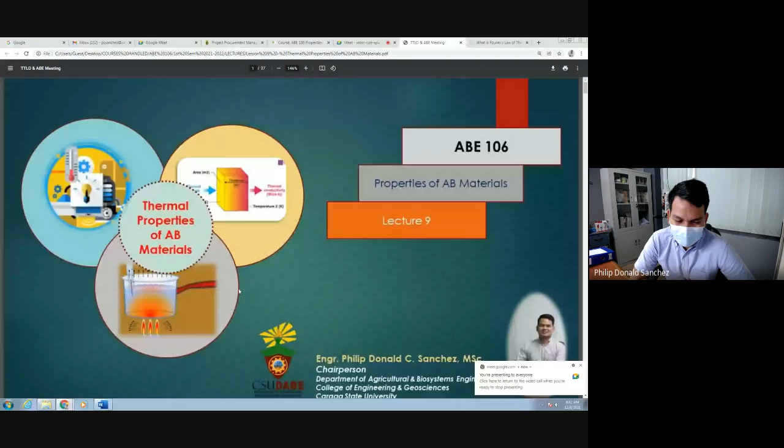Okay, Donald Tiamco, Donald, can you recall and share to us what is the nature of conductive heat transfer, or the mode of heat transfer which is through conduction?

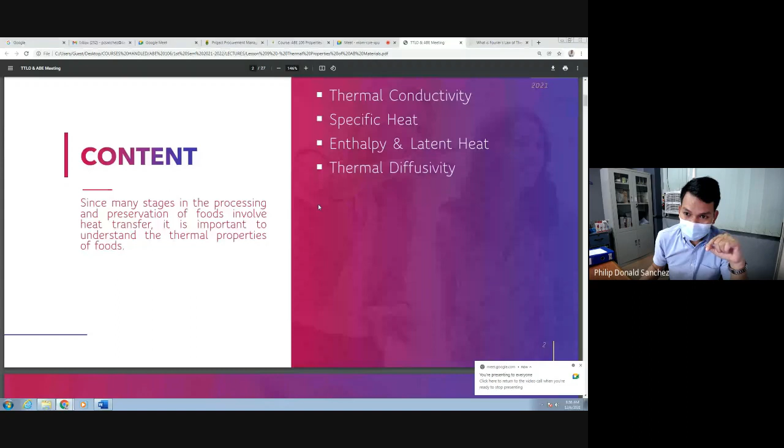Q, or the heat flux rate or the heat transfer rate, is equal to the negative rate of heat transfer by means of the material's conductivity, or the thermal conductivity of that particular material, times the thermal gradient, or the temperature gradient, which is T1 minus T2.

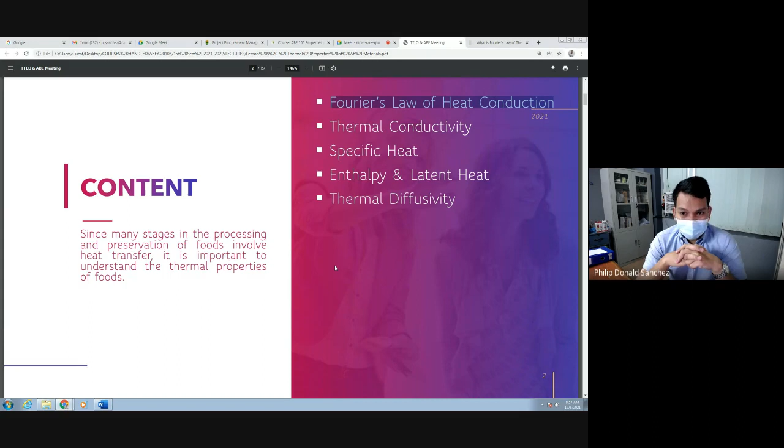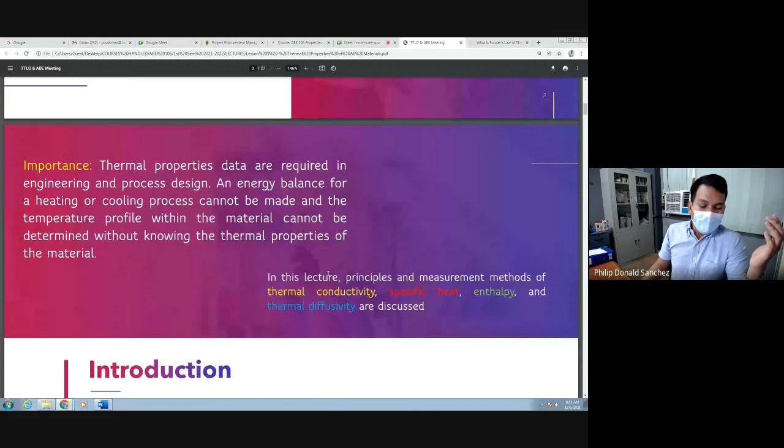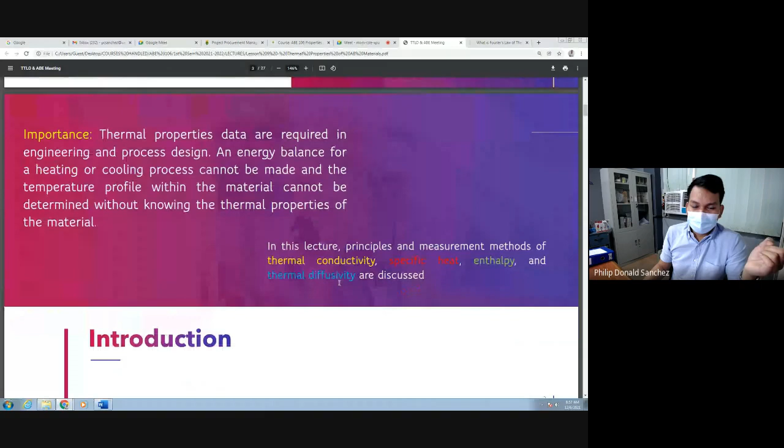Okay. It's very important, guys, that the thermal properties data are required in engineering. Kana pod, moingon na sila asa ang formula wa ni gibutang ni Sir Philip diri, no? So itanaw niyo sa Google na lang ang formula ni thermal property, ni thermal conduction, Fourier's law, and then try to understand again basig nakalimot na mo sa inyong heat transfer. So mag-agad na pud mo diri nga ako na pud nang spoon feed, no?

It's very important that the data are required in engineering and process design. Very important ang mga thermal data. An energy balance for a heating or cooling process cannot be made, and the temperature profile within the material cannot be determined without knowing the thermal properties of the material.

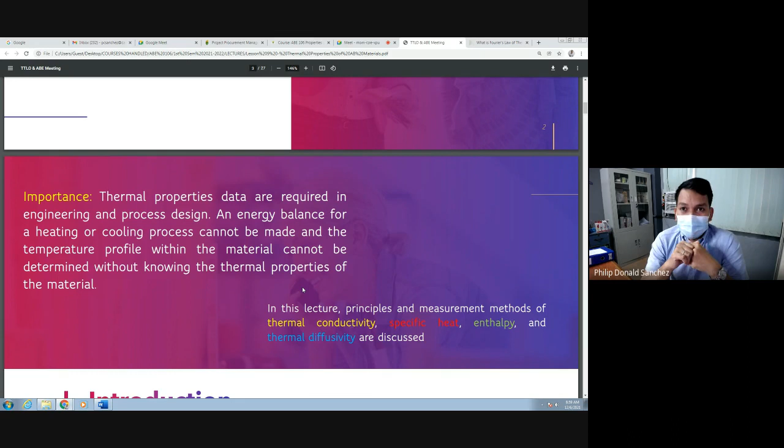preservation and processing. In this lecture, however, the principles and measurement methods of thermal conductivity, specific heat, enthalpy, and thermal diffusivity are taught, or discussed. Okay.

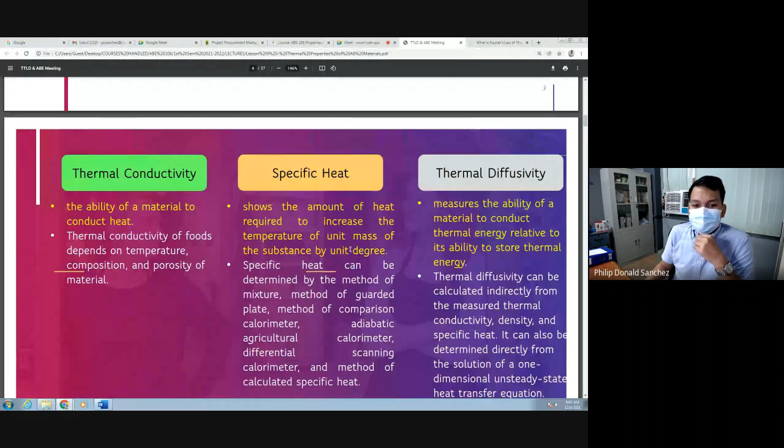So that's the difference between these 3 major thermal characteristics or thermal properties. Sabtan, pag-exam natin. Okay, just a review of Fourier's law. We need a driving force. According to Fourier's law, we need a driving force to overcome a resistance in order to transfer a property. What force ang iyang gipasabot ana? For any kind of molecular transport process like momentum, mass or heat, the general equation can be written as follows. The rate of heat transfer process is equal to the driving force over the resistance.

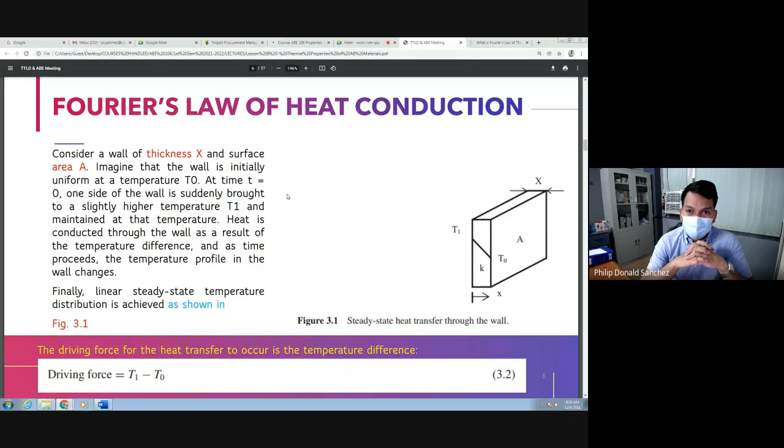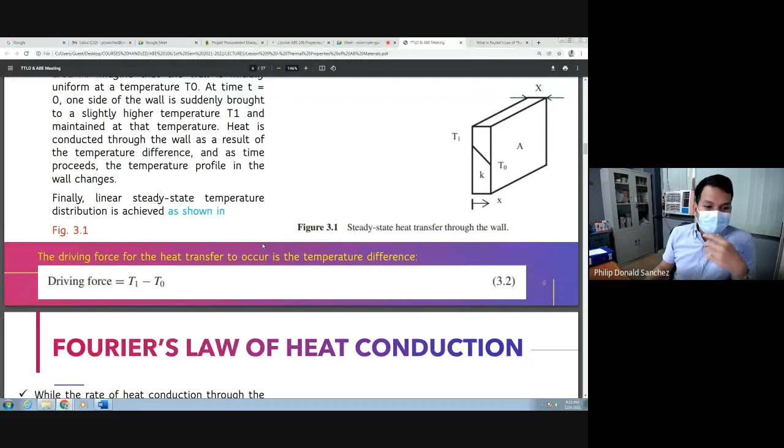The driving force for the heat transfer to occur is the temperature difference. Di ba? Temperature difference ang driving force niya. Why? Because wall side A and wall side B do not have the same temperature effect.

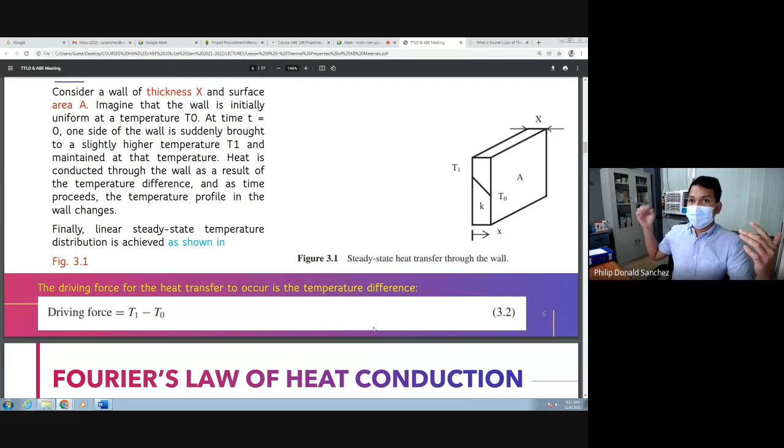Okay? So the driving force therein is the induction or conduction of heat by means of an air conditioner or by means of sunlight. So driving force, pasiglahi nga atong masabtan. While the rate of heat conduction through the wall is proportional to the heat transfer area, the thickness of the wall provides resistance to heat transfer.

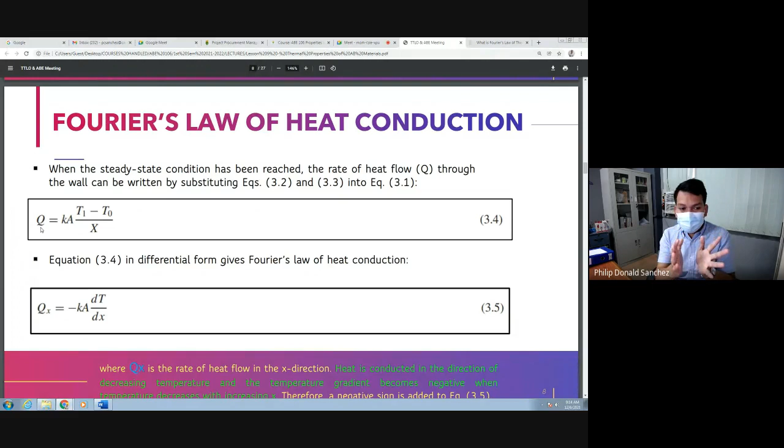You cannot find a material now without thickness. Even packaging material that's extremely thin, like biofilm, you still need to determine its thickness. That's why area is now involved, or thickness. Meaning, the thermal conductivity of the material times its area times the change in temperature is how you get the heat flux or heat transfer.

With the presence of the value x or thickness, if the temperature changes and the area changes, it will differ, and then the equation also differs as a differential equation: negative K times dT over dx.

Don't assume that if you use a wall, and you attach some material to it, but the wall you use is concrete, while another wall is also concrete but with an admixture like asphalt added, don't assume they have the same effect. Because they do not share the same material or composition, even if they have the same thickness, size, or area. Different composition means different temperature effect, and different material also varies.

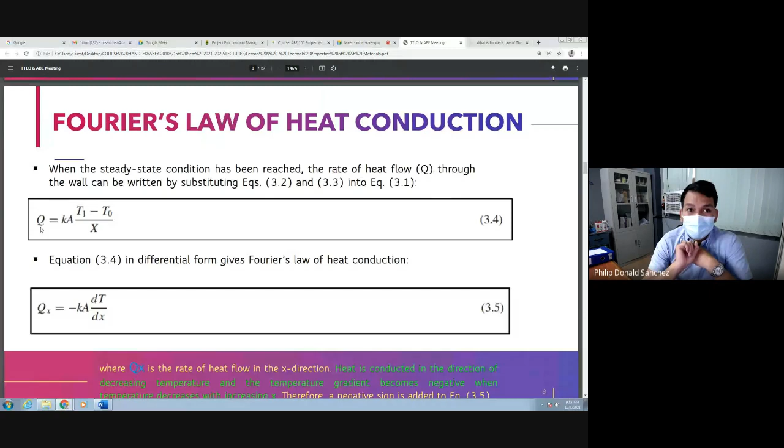Take note, heat flux is equal to heat flow, but it's different from heat transfer, because heat transfer is the rate of heat transfer. If you say heat flux, it's just the flux or the flow, meaning with the presence of heat or change in temperature and the thermal conductivity, that's the flux or flow. If you say rate, it's with the addition of area or thickness.

That resistance from the thickness aspect gets included there. That's why if you ask what is the local heat flux or internal heat flux, the unit for that is watt per meter square.

But if you say heat transfer rate, heat flow rate, or heat conduction rate, it's multiplied by the area correspondingly, to get the heat transfer rate. If it's just flux, it's just the flux on that particular area, or its presence of heat flux or heat flow.

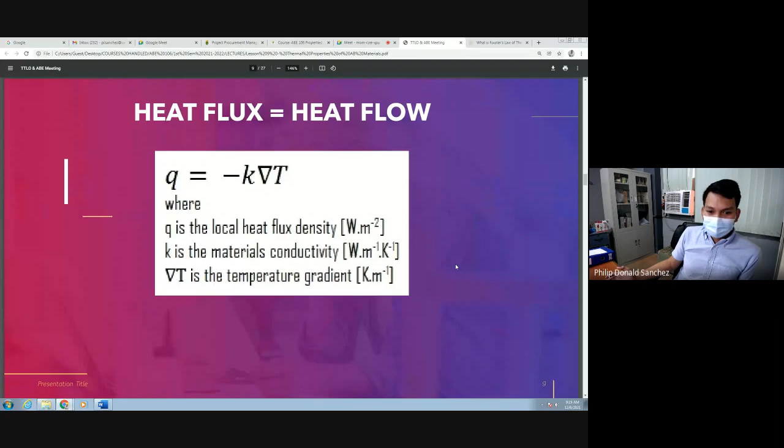Alright, so that's the reason now. If they ask that in the board exam, Bala can answer that.

Sample problem from Sir Philip, let's transfer to that. A major source of heat loss from a house is through the windows. Calculate the rate of heat flux through a glass window 1.5 meter by 1 meter in area and 3 mm thick, if the temperatures at the inner and outer surfaces are 14 degrees and 13 degrees centigrade respectively. Calculate the heat flux through this window. Assume that the thermal conductivity of common glass is K equals 0.96 watt per meter Kelvin.

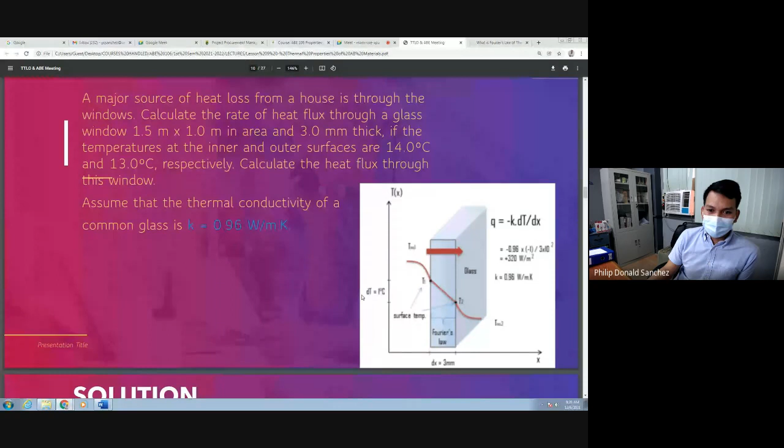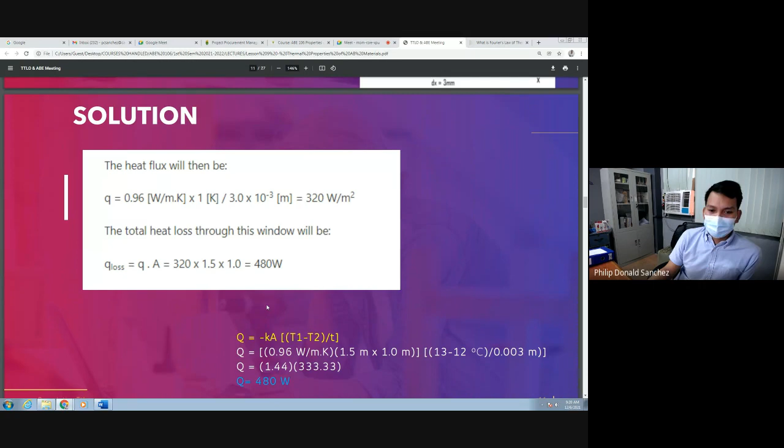So the area is 1.5 by 1 meter, or 1.5 square meters, but the thickness is 3 mm. You just convert it to meters, the 3 mm thickness. Then using the formula, negative K, A, delta T over T, or the thickness X, where X denotes that thickness, you can now get the Q loss equal to 480 watts. Just try to solve it there. That's the formula, there's no reason you can't solve it. And then you're done with that. Okay, so that's just the basic.

But the essence here is I want you to understand its effect later on regarding crops or ABE materials. Okay, basically the heat transfer you've already learned, what heat transfer really is. But the essence is on the crops or the storage. That's why I keep talking about refrigerators, freezers, chillers, whatever.

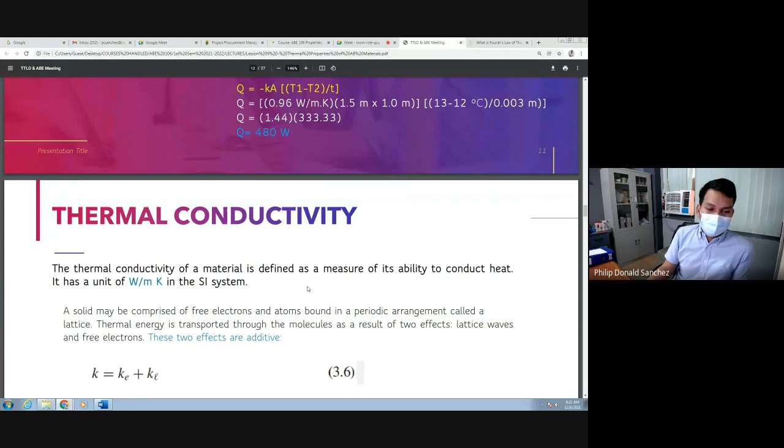Okay, the thermal conductivity of a material is defined as a measure of its ability to conduct heat. That's why I mentioned thermal conductivity, that's why its unit is watt per meter Kelvin. That's the ability of the material, that's why if you give it a temperature difference, from higher to lower temperature, how much ability this material has to resist or change accordingly to the difference in temperature with that particular thickness of the material or body. With that, you get its conductivity as a rate of watt per meter Kelvin.

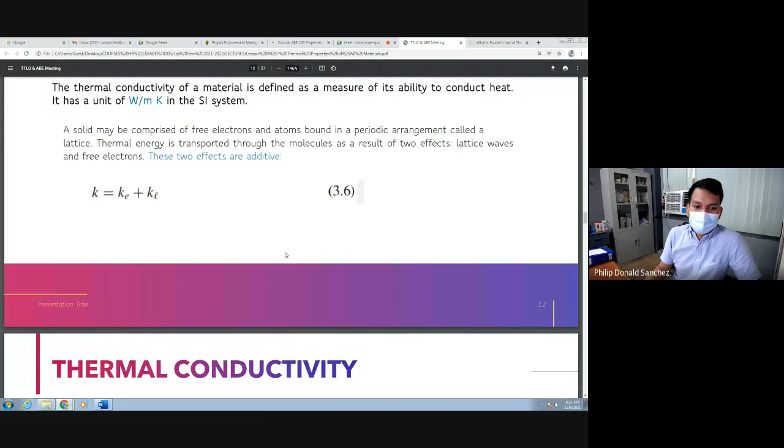Okay, so with that equation called additive, two effects additive, you just add effect 1 and effect 2, and then you have common effects in both materials. Okay, different materials have different thermal conductivity, as I've always mentioned.

What usually causes that to vary, guys? Of course, composition. But aside from composition, it's what we call vibrations or lattice vibrations. Like for example, steel material versus iron material have different thermal conductivity because the composition of iron and steel differs correspondingly, of course. But when we talk about vibrations or increase in effect, it differs because the vibrating effect given by steel or iron differs depending on the temperature you apply to them.

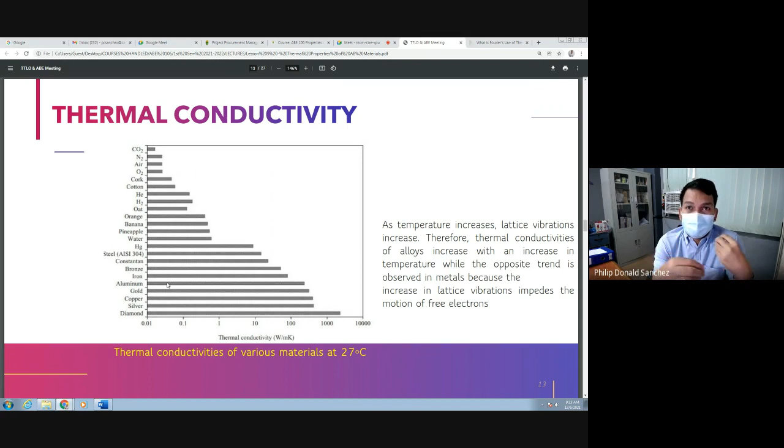All right, so thermal conductivity of ice is nearly 4 times greater than that of water. The thermal conductivity of ice is 2.24 watts per meter degree Kelvin, or degree Celsius, at 0 degrees Celsius, which is ice at freezing temperature. So at 0 degrees Celsius it's 2.24 watts per meter degree Celsius. Okay, this partly accounts for the difference in freezing and thawing rates of food materials.

During freezing, the outer layer is in the frozen state and the ice propagates toward the center, replacing non-flowing water by a better conductor. You've seen and tried frozen materials, right? For example, frozen meat. Okay, where does a frozen body start freezing? Outside or internal? External or internal? Outside, sir, external, outer layer. Why? Because it's the first to get affected, sir. Okay, what is it? You're in contact with the atmosphere.

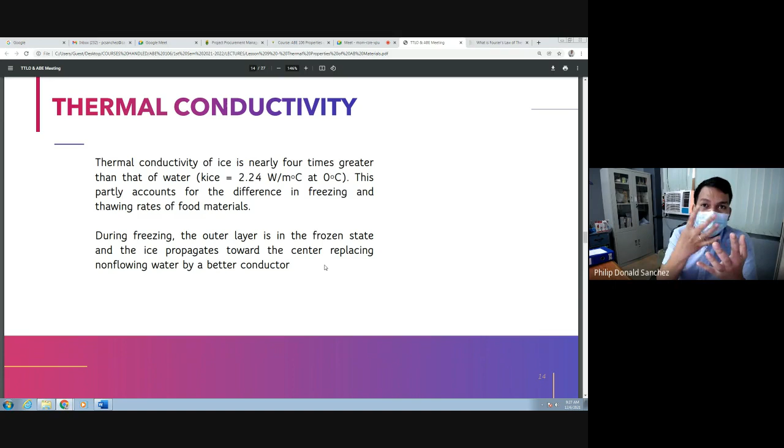Moisture, pero tungod freezing man god. Pero kung storage ra nga ref, wala na siya ingana nga effect. Moisture induction man god ang chilling. Pero kung freezing gani guys, mo-action siya gahi, mo-solid form siya, mo-action siya gawas ang internal niya. That's why pagawas ana mo, mo-form na dayon nga ma-ice na siya nga crystals. That's the reason behind. Pero kung i-ref ra nimo siya sa normal temperature lang niya nga 14 to 18 degrees, dili siya ingana, tungod kay dili man siya mo-solid form. Ang iyang mga kuan nga murag mo-evaporate pagawas, mo-form into crystals and then it will create mas ma-ice ang gawas kumpara sa ilalom.

And then pag slice nimo, gahi ang ilalom, di ba? Mas gahi ang ilalom pero mas frozen ang gawas. Pero mas gahi ang ilalom kay ni-gawas na ang iyang internal nga composition by means of moisture. Pero imo na siyang ihumol balik, mobalik na ang iyang tubig. Okay, so ingana siya ang reason.

Because you know, I learned this when we visited one of the freezing companies of durian. Ang reason ana ng i-frozen nila kay nagbisita mi sa una during my masters. Nagbisita mi sa durian nga i-package lang nila, i-packaging lang nila para ila lang i-baligya automatically sa market. Those durians nga gi-package nila, i-export pa nila dito sa China, i-export pa nila sa Australia and wherever they want to export, frozen.

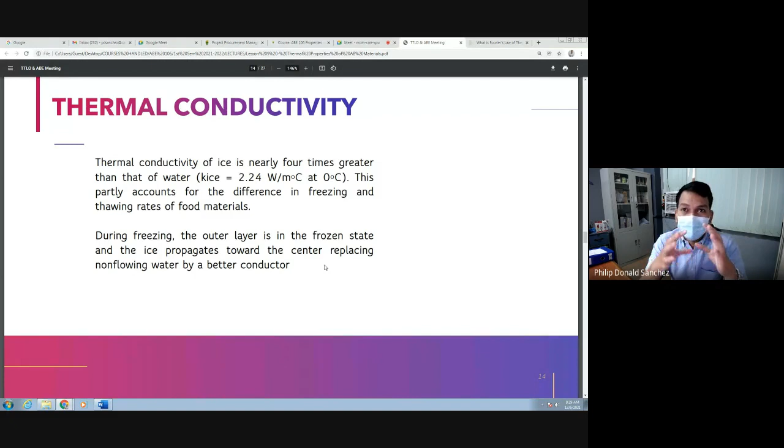Because when we freeze the material, wala siya corresponding effect as compared sa storage lang na normal nga ref. Pag defrost na nimo siya, compact ra, steady ra, maintain lang ang iyang composition. Pero una gid ang gawas nga mo-frozen because nagyapon na siya, nagtawag nato nga murag... I'm not sure if the correct term is evaporation gyud, pero ingana. Ma-defrost siya, retain ang iyang composition, na siya addition ng moisture, induction of moisture. But as to the flavor, as to the taste and the quality, the same. That's the essence of freezing.

Okay, so asa si thermal conductivity ni-sulod dito sa time, mga abilidad niya nga makaya niya. Kung di na kaya, then it's deteriorated na, baho na.

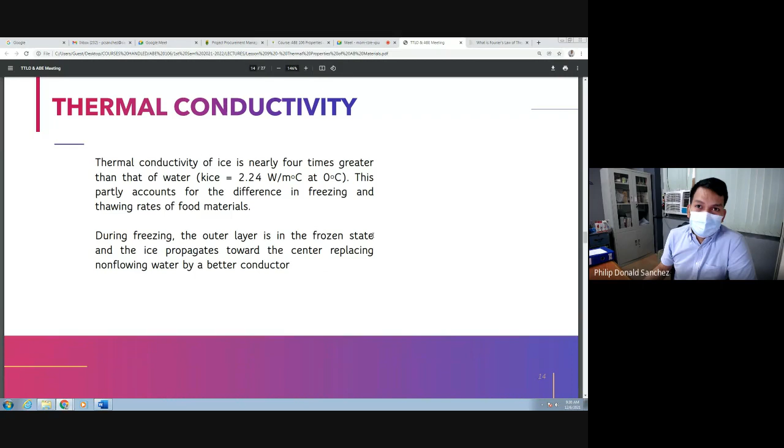That's why kanang mga exported nga materials, makabantay mo frozen gid na sila. Frozen. Uban, for example, kami, akong uncle, bisita mi sa Manila, i-frozen na ang mga crabs. Flight, pagkaugma isulod sa ice box ang frozen nga crabs, close tightly ang ice box. Pag abot dito sa Manila, bisan pag nag-flight ka or pila ka oras or nag-land trip ka, still the quality is okay. The only thing is na-siya moisture. But when you defrost, matanggal man ang moisture, but the quality is still retained. Okay, so that's the essence and significance of freezing.

Okay, measurement of thermal conductivity can be done by either steady state or transient state methods. In steady state methods, two sides of a flat object are maintained at constant but different temperatures, and the heat flux through the sample is measured. Steady state methods are longitudinal heat flow, radial heat flow, heat of vaporization, heat flux, and differential scanning calorimeter methods.

One side and the other side, wala kang ichange, and then nag-add ka or nag-maintain ka ng temperature on the different temperatures on the other side and the other side. But usually, these particular phenomena we can usually see this in kanang mga industries.

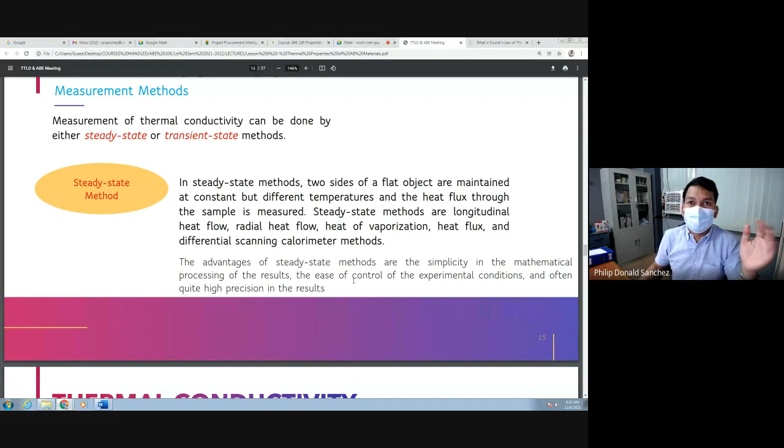No? But there's no need for us to memorize because the table, the internet or the books can give us what's the optimum range of storing that particular material. No? Pila ang iyang capacity. So, kung longitudinal state, so QL or the length of the material divided by the area times T1 minus T2 or the temperature gradient. Temperature gradient is another term for temperature difference. Pareho ra na siya. Gradients, no? The gap, no? Temperature gap, temperature gradient, temperature difference, no?

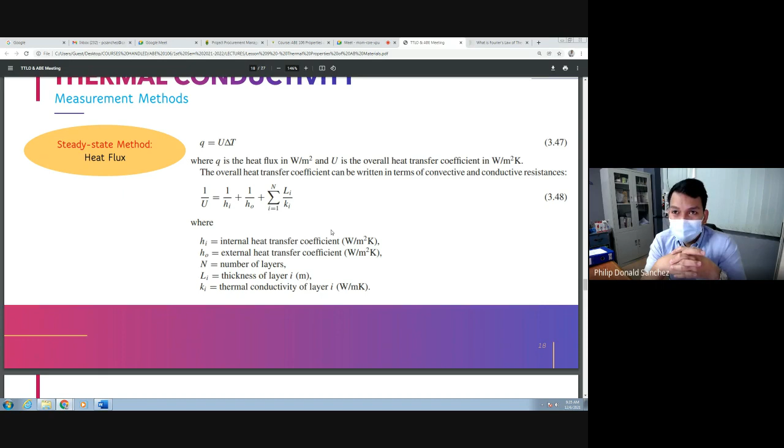So I hope that you're learning and you learn from the basics. A specific heat, no, sama sa akong gi-mention kanina, it's the amount of heat required to increase the temperature by unit mass, no.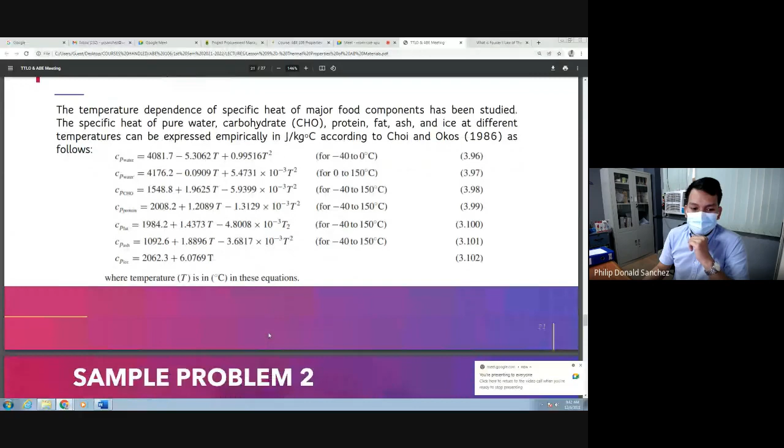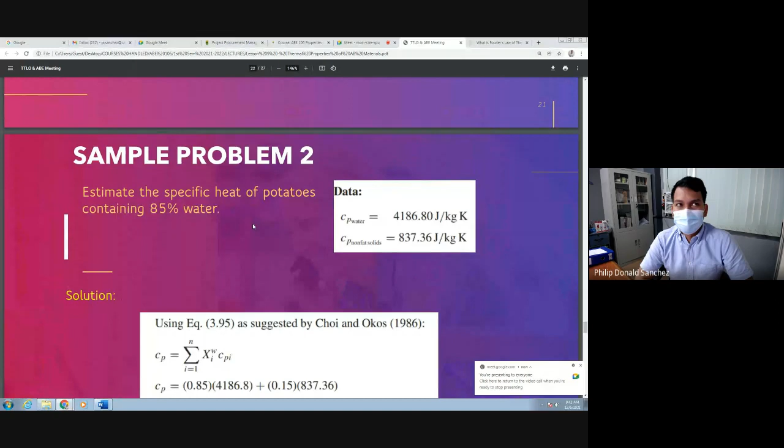Okay. For example, sample problem: estimate the specific heat of potatoes containing 85% water. No, ang patatas, 85 ang tubig daw ana sa sulod. Pila kang specific heat? The data shows that the constant specific heat of water is 4186.8 joules per kilogram Kelvin or 4.186 kilojoules per kilogram Kelvin. And then the specific heat constant for non-fat solids is 837.36 joules per kilogram Kelvin.

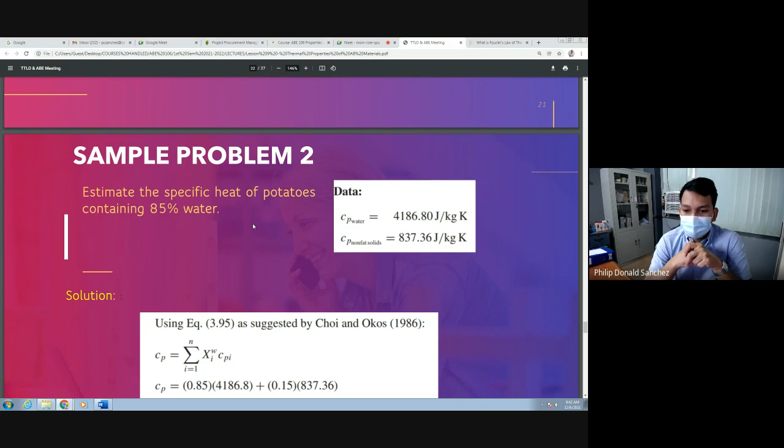Then, using the equation of Choi and Okos, you can now get the specific heat as the sum of 0.85, the water content, no? Then, multiply it by the value for water. Then, the remaining, out of 100%, which is 15%, would be the non-fat solids. Why? Because the composition of potatoes is just water and non-fat, or water and the carbs. The carbs represent the non-fat. So the starch of potatoes is 15% and the remaining is moisture or water.

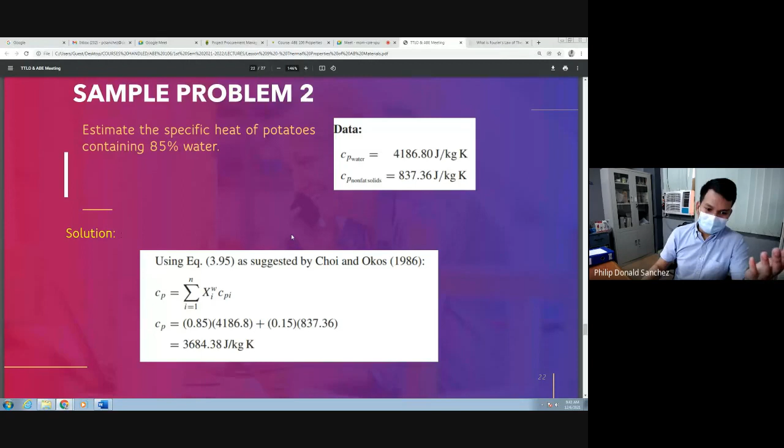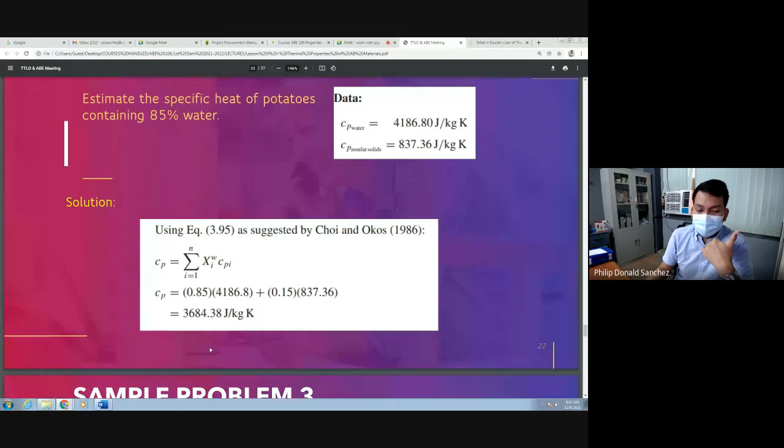Then, how to get it? Just a summation. Multiply the percentage of water times the specific heat value for water, and then plus the percentage of non-fat times the specific heat of that part. And then you can get the specific heat of potatoes as 3.684 kilojoules per kilogram Kelvin or 3684.38 joules per kilogram Kelvin. Basic. Dali ra.

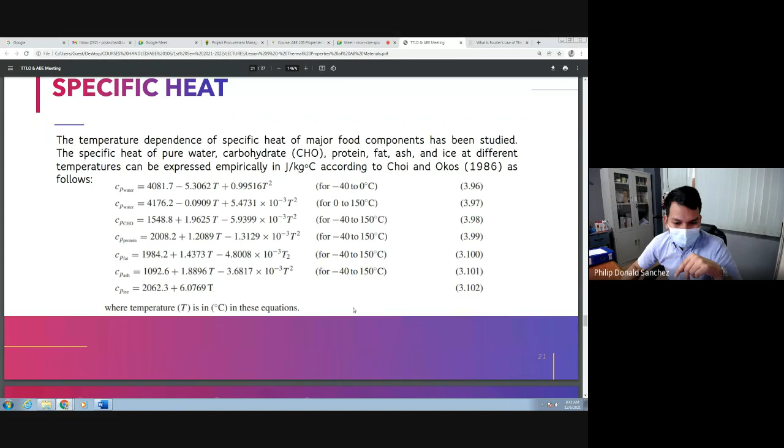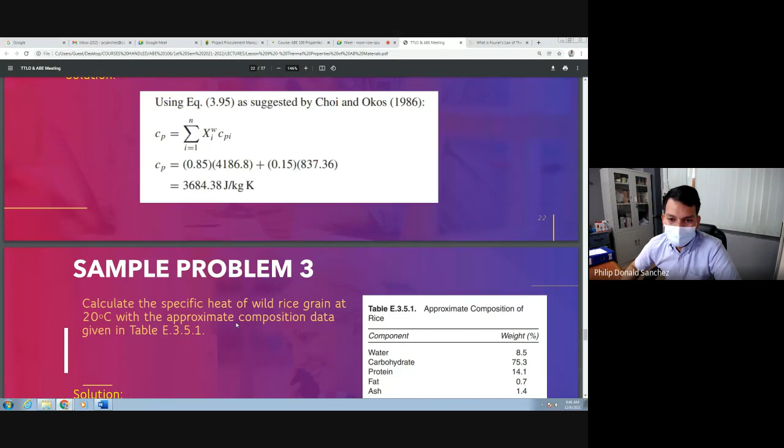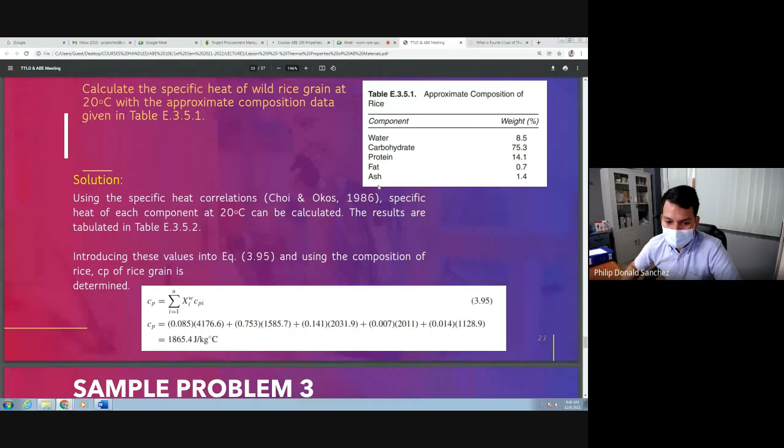The 8.5 becomes 0.085 times the specific heat of water, 4176, plus 0.753 for carbohydrates. What is the value of carbohydrates? The carbohydrates value is 1585.7, plus this weight times 2031.9, plus 0.007 for this one.

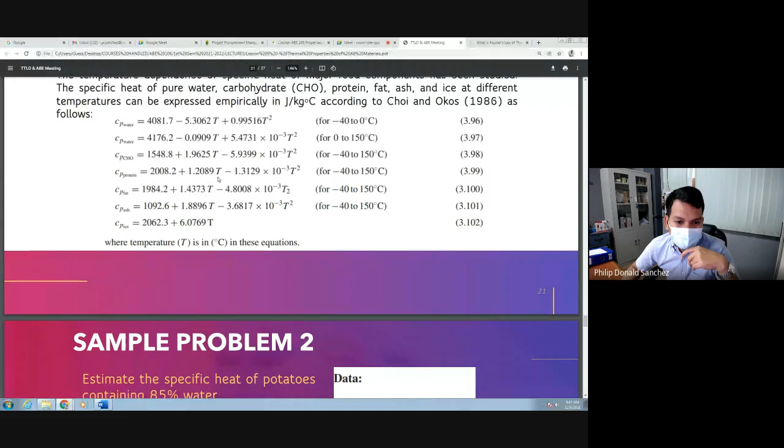So, if you input 20 into this: 4176.2 minus 0.0909 times 20 plus 5.4731 times 10 to the negative 3 times 20 squared, that is the value that comes out, 4176.6. For protein, if you input 20, the value for P also comes out. And then the CP of rice grain is equal to 1865.4 joules per kilogram degree Celsius. Then that's the specific heat.

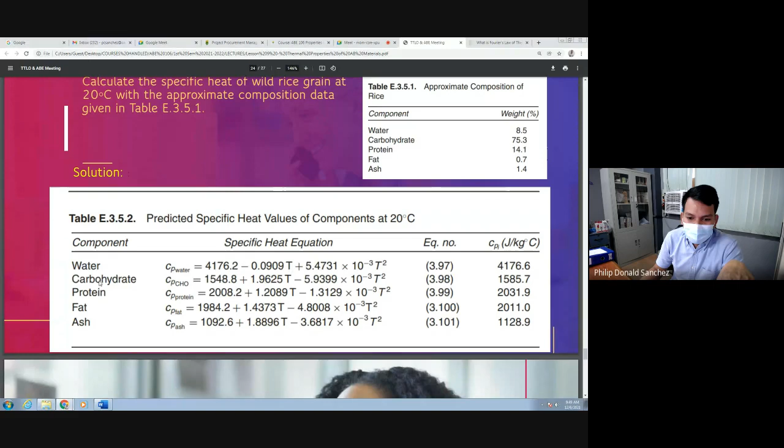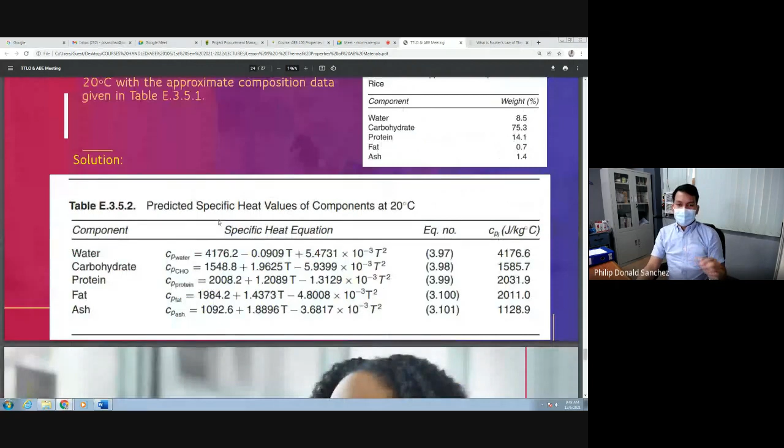Okay? Any questions so far with the calculation of specific heat, thermal conductivity, heat flux, and so on, applicable to the ABE materials? Any questions, clarifications?

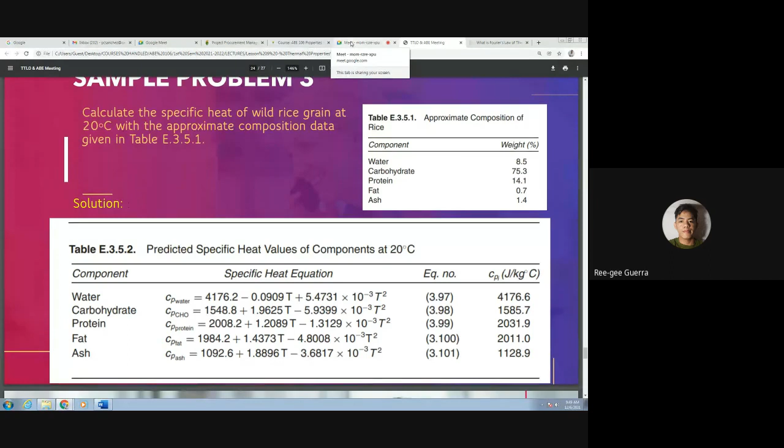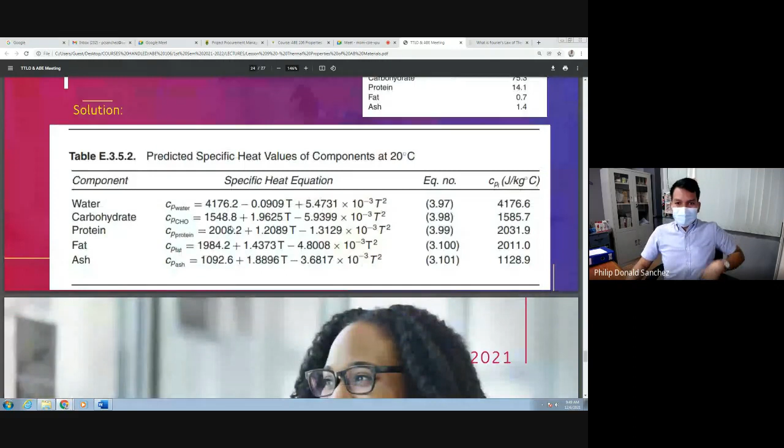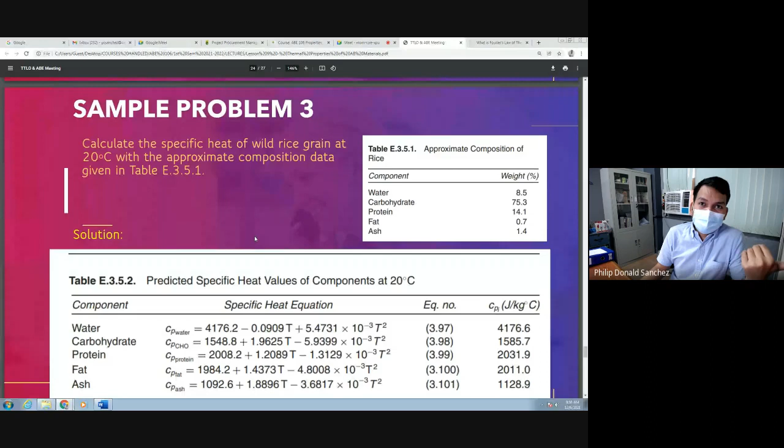Wala na. Dili na. Because thermal diffusivity, we don't need to measure thermal diffusivity as far as changes in composition are concerned, no? Ang pinaka-kuan gyud is ang specific heat o ang iyang conductivity. Si thermal diffusivity dili na nato apilon. Kay usually dili na nang ginakuha si diffusivity unless if it will really involve liquids to liquids, no?

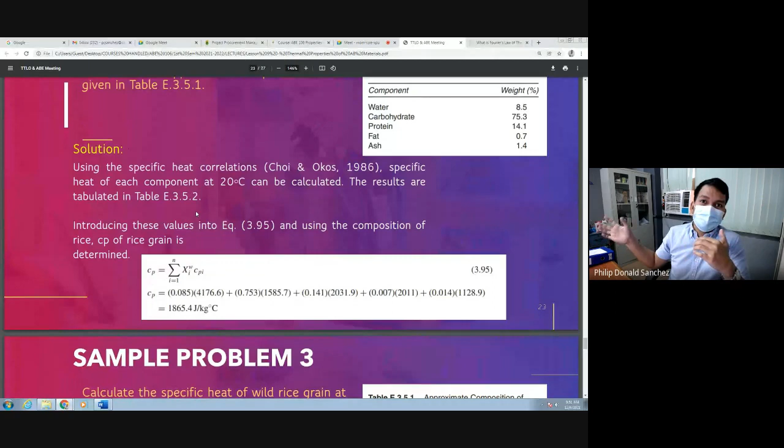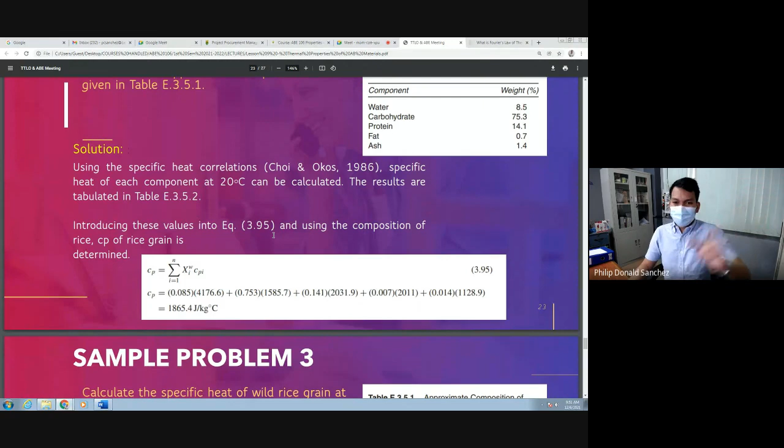So dili na ko atong diffusivity, di na ko to i-apil. But the most common is specific heat, thermal conductivity, and then heat flux and heat flow.